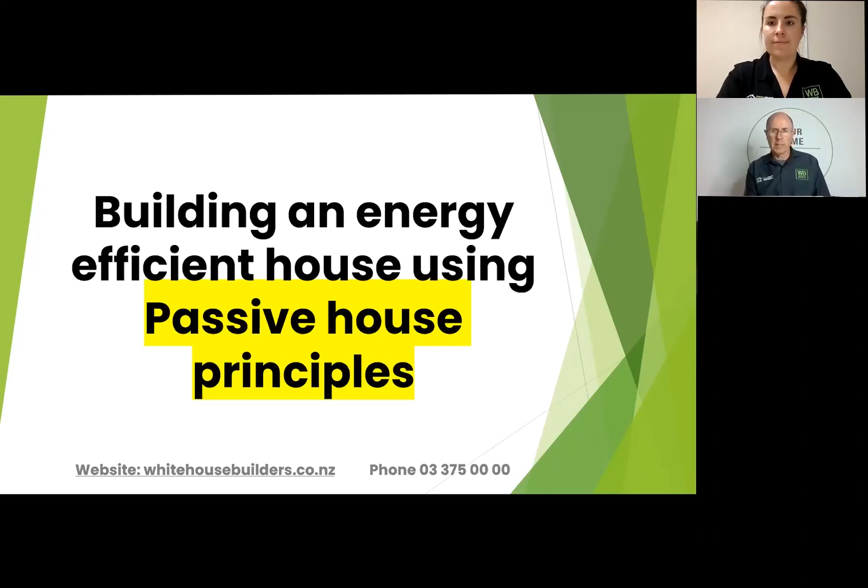Okay, thank you for giving us your time this evening, and hopefully what we're going to show you helps make sense about how to build an energy efficient home using the 5 passive house principles.

I think first of all, I better explain what I'll talk about today: who I am and what my qualifications are, what is an energy efficient house, and building an energy efficient house using the 5 passive house principles. I will explain each of them to you. What are the biggest causes of failures when building a passive house and how we avoid them from happening. There'll be an overview of what I've talked about, and then at the end we'll answer any questions that you have.

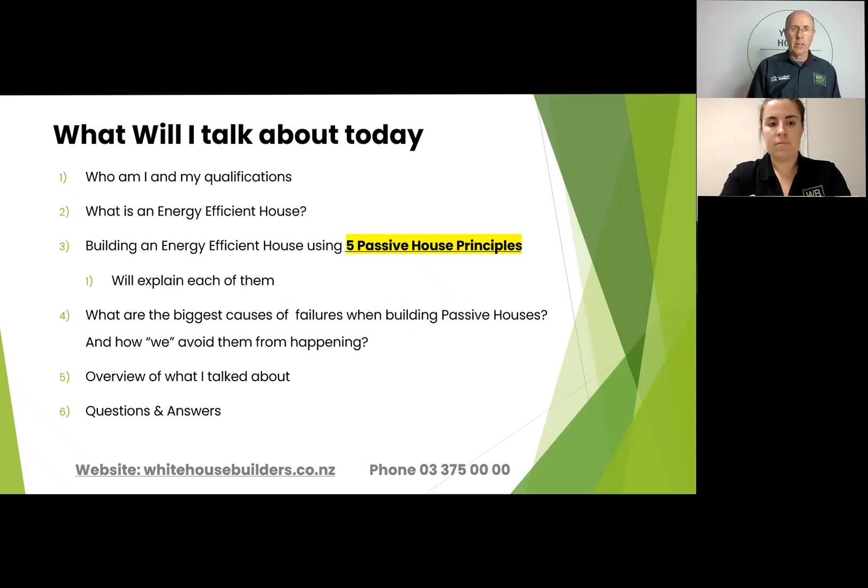So first off, who am I and what are my qualifications? I'm tradesperson certified by the International Passive House Institute, a licensed building practitioner, registered master builder. I've been building in Christchurch for over 20 years, and we're not here to sell you any particular product, only look at what works, and we're passionate about building energy efficient homes.

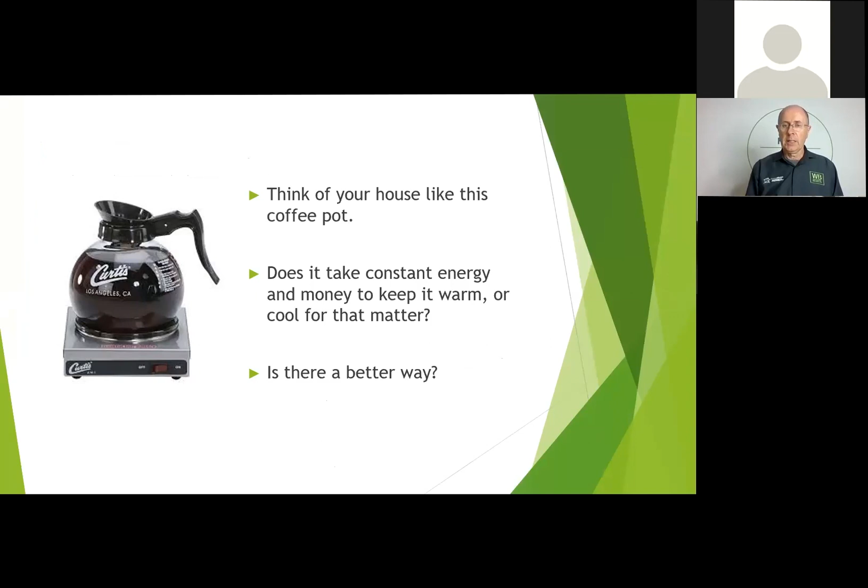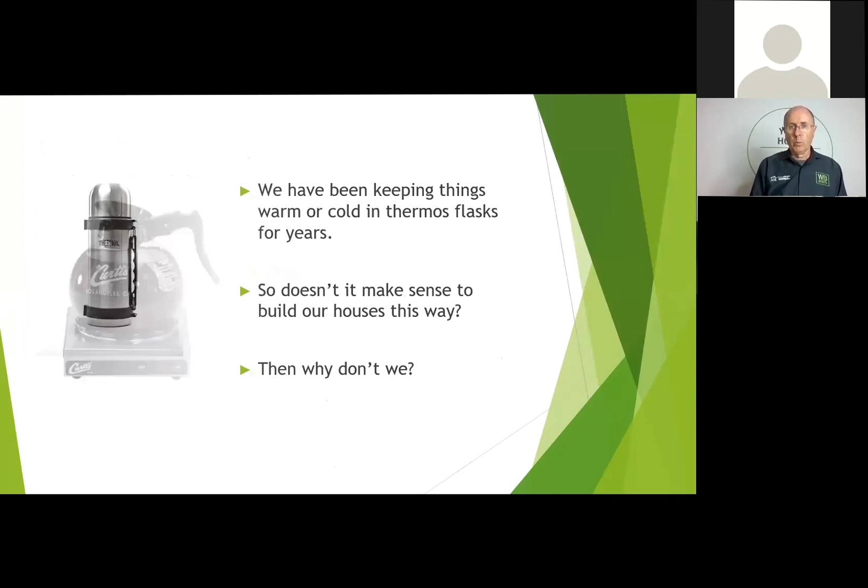So, if you think of your house like this coffee pot, does it take constant energy and money to keep it warm, or cool for that matter? And the question is, is there a better way? Well, we've been keeping things warm or cold for that matter in thermoses for years. So doesn't it make sense to build your house that way? And the question is then, why don't we?

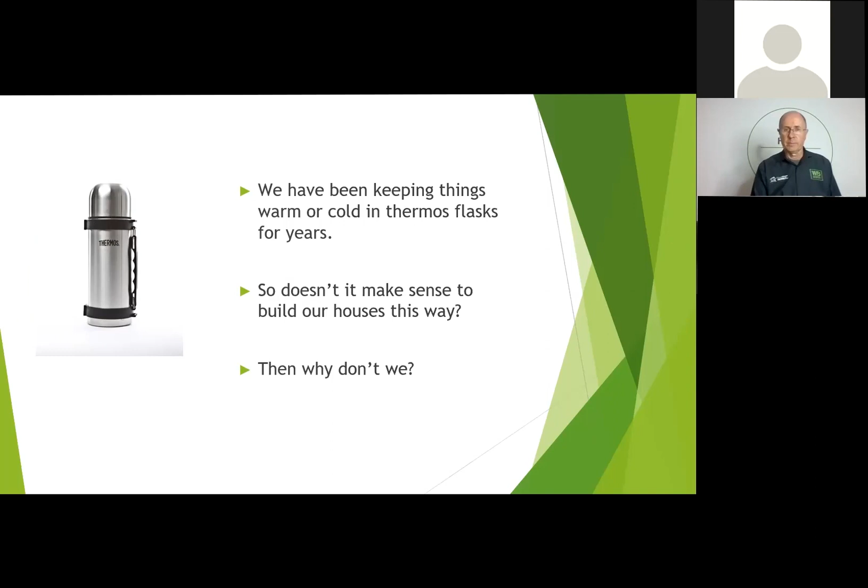This is a question I get asked all the time. What is an energy efficient house? And the answer is, to put it as simply as possible, how does the house lose its energy after the sun has gone down? And the less that it loses, the less you have to put back in. It's simple to do, but as you'll see, it's hard to achieve.

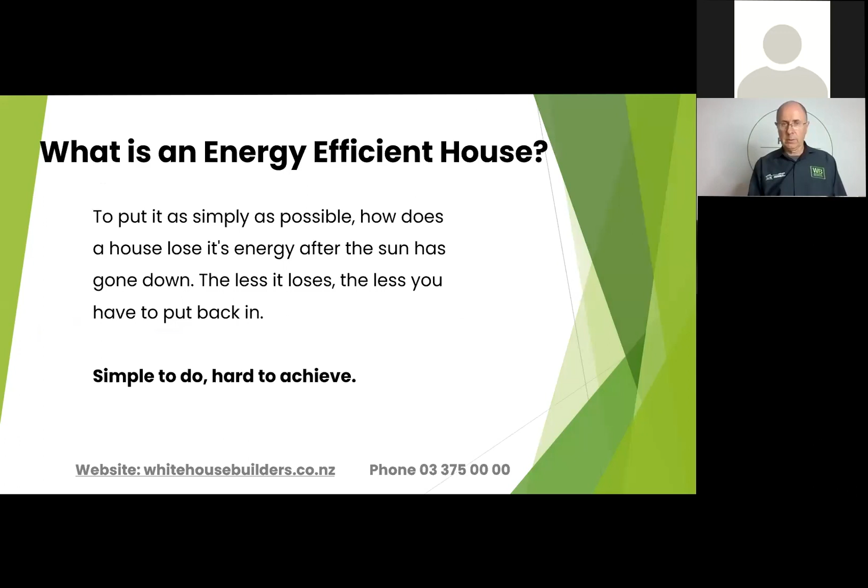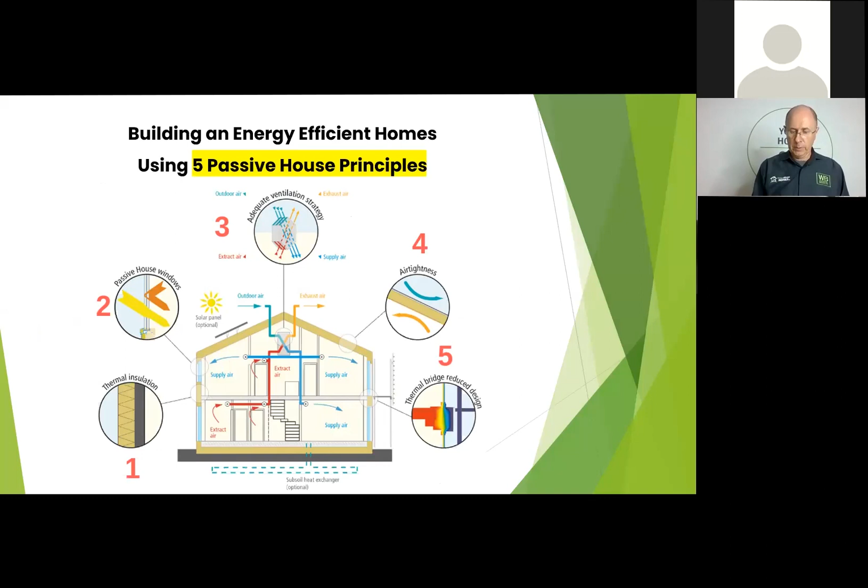These are the 5 principles that we use in designing and building energy efficient homes, the 5 passive house principles. And we'll run through them one to 5. So number 1, thermal insulation.

What are the benefits of good home insulation? Well, insulating your home to a higher standard will add to your comfort. It'll keep you warm in winter and cool in summer. It creates a healthier home environment for you and your family. It reduces outside noise. It reduces your energy bills. And it will have a positive environmental impact.

Now, I should say, the reason we put reduces your energy bills down the list is that, yes, the house will pay for itself over time, but there is a cost that's higher than the standard build to build an energy efficient home. So it costs you more money in the beginning, but it will pay for itself over time.

People who live in these homes will tell you about the comfort, and they'll tell you about the health benefits and how lovely the house is to live in all year round. So the comfort factor and the health are the 2 biggest reasons that we think that people should be looking at living in a home like this.

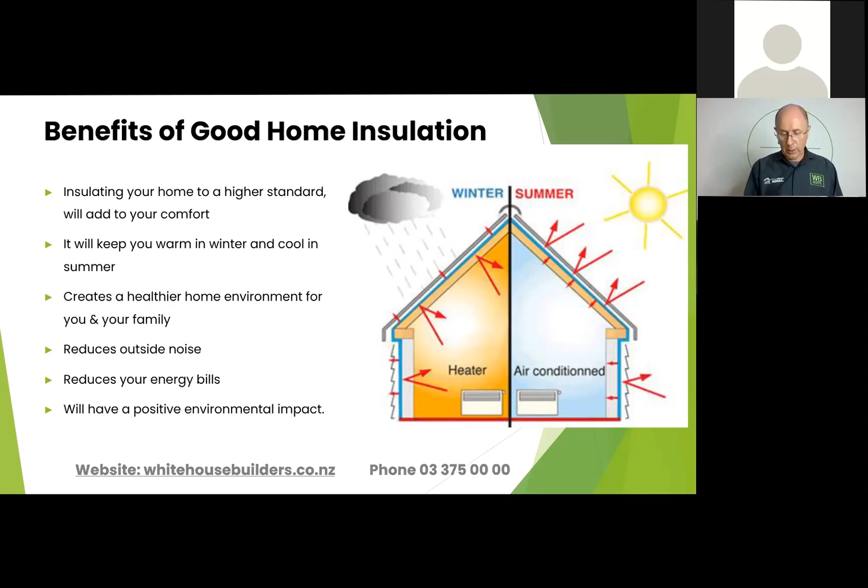Now, if you Google the World Health Organization, they will tell you that sleeping in temperatures below 12 degrees centigrade can seriously damage your respiratory system, and that adults should be sleeping in temperatures of 18 degrees, and babies and older people should be 20 degrees.

So it is a problem how people in the winters get a cold on them. They're going in cold environments all the time. They can't shift the cold because they're in that cold environment where the cold air, the damp air, is being breathed in and causing them problems all the time.

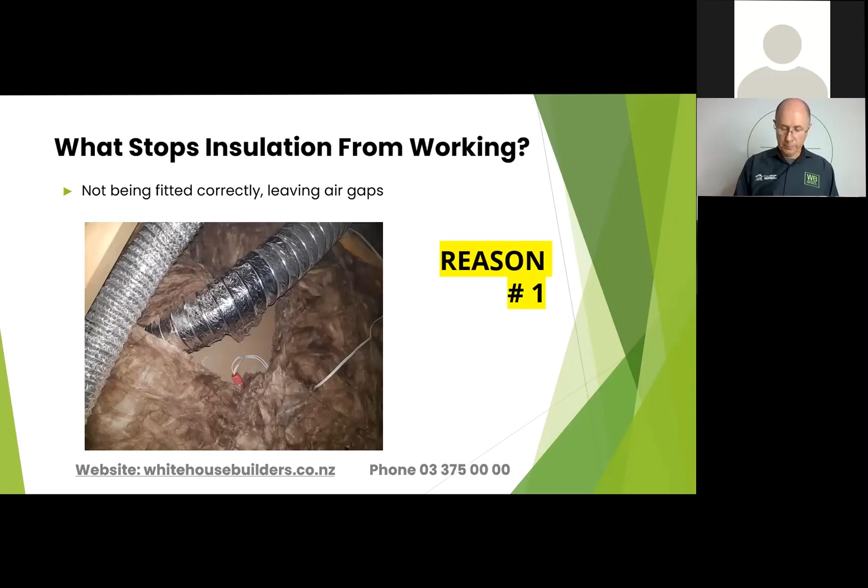The other thing that people find interesting is that if the insulation is fitted too tightly, not having enough air trapped between the fibres, then it also doesn't work. The wool insulation works by having the air, as I say, trapped between the fibres. And when it's crushed tightly, the fibres crush together and it conducts the energy across. So it reduces the effect of the insulation.

Unfortunately, what happens when people are building homes with the home builders is that it's done on a contract. People come in, they fit it as quickly as they can, and this is often the case where it's not fitted correctly, and then your investment isn't working.

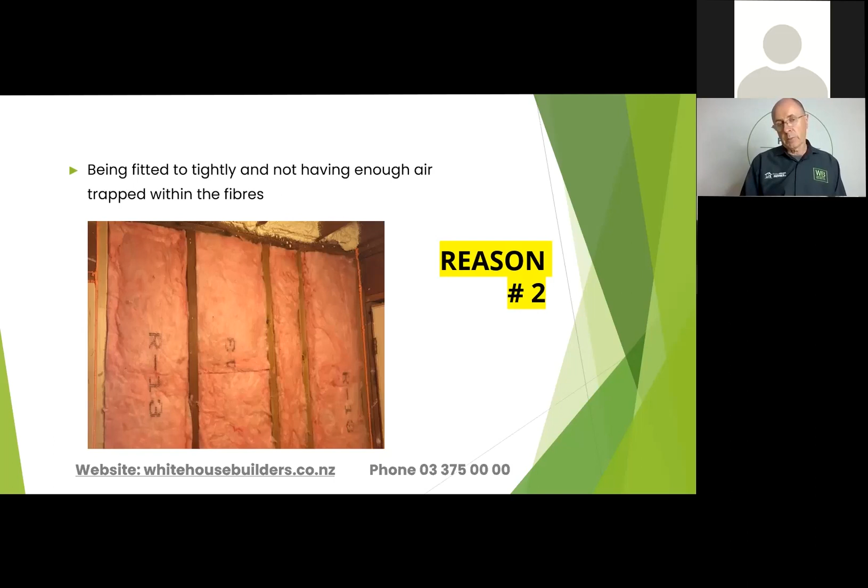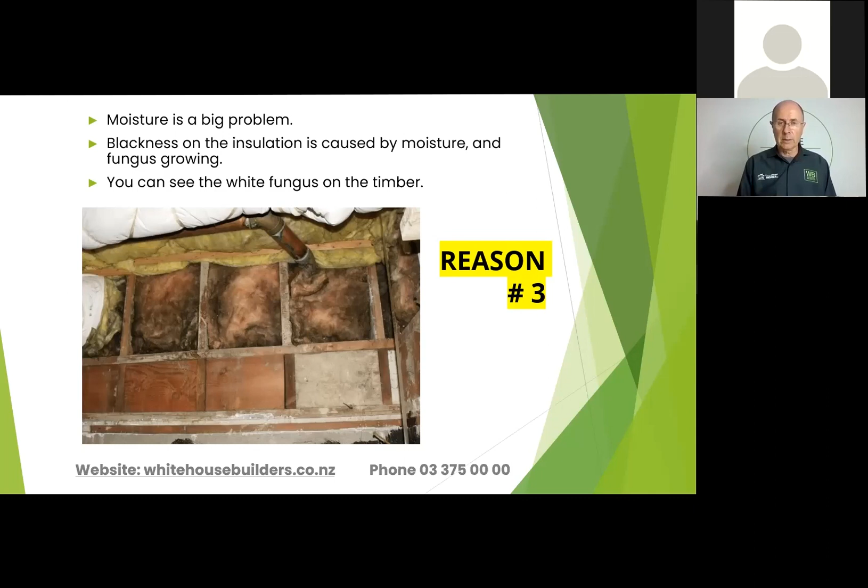Moisture is a big problem. The blackness on the insulation here is caused by moisture, and on the white part of the wood you can see fungus growing where the GIB has been removed after a few years. You can see the white fungus growing on the timber there, and it causes mold, and then there's all sorts of health issues that can be associated with that. Unfortunately, this is how our present building code deals with these problems.

So what happens is the air pushes through little gaps around your sockets, around any wires, any outside taps or anything that's coming through the wall, and it carries the moisture through. Once it gets to a dew point, it becomes like a mist, and it drops the moisture in the wall. Next your insulation starts to get damp and wet, it starts to sag, and then you've got no insulation in the wall. You've got big gaps in there. It is a major problem in how we build today.

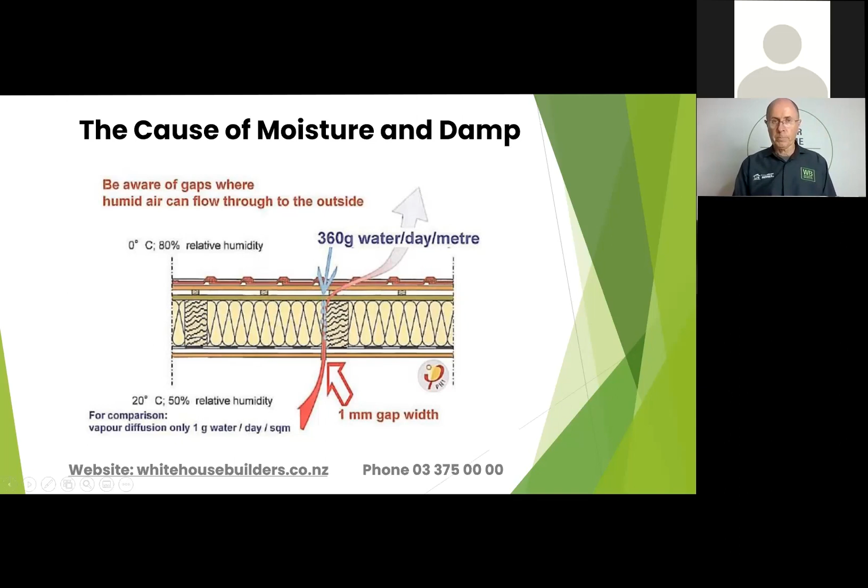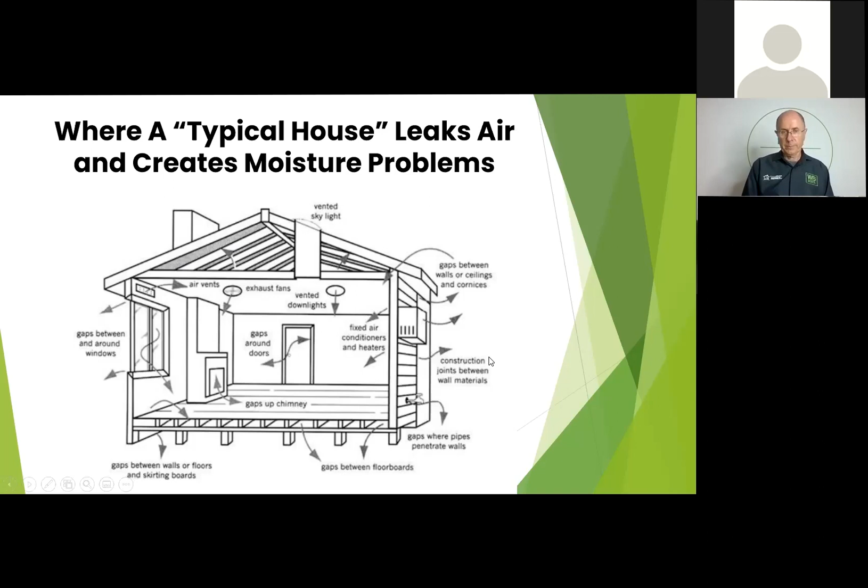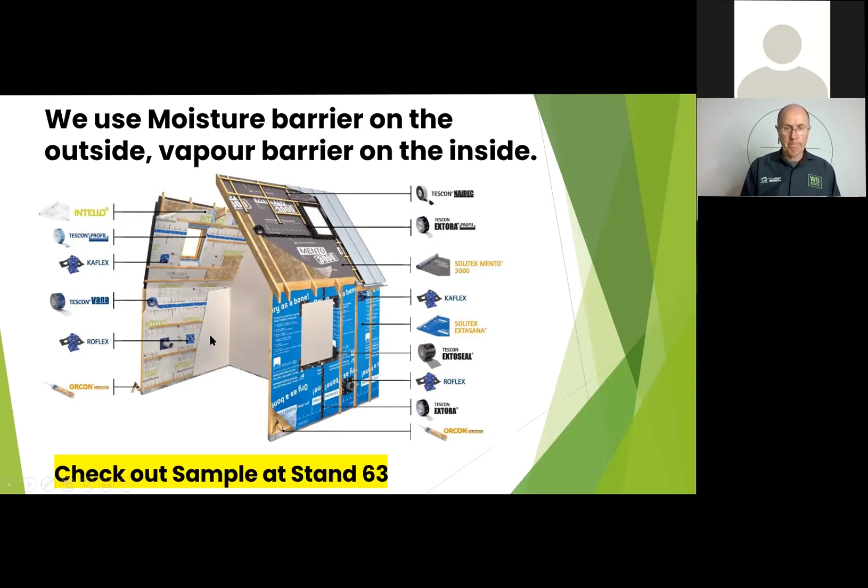Here's a cross section of how the moisture barrier system works. So again, this is the inside of the house here. This is your gib board, and then this here is your vapor check Intello on the inside. This is your timber frame, and this is your insulation here. This blue one on the outside here, this is your moisture barrier. So it won't allow any moisture through here, and we won't allow any vapor here. So we're keeping this critical part of the insulation dry.

This area here is just a service void. In the service void, that's where your electrics and your plumbing go. But you actually get another R1.4 insulation in here, or more insulation in there. In here, in a 90mm wall, you can get up to R2.8. Now, when you consider in Canterbury, the code is R2. Most builders will put R2.3, R2.4 in, or even 2.6.

But in a wall like this, you can get R4.2 on that wall, which is over twice the code of insulation. And also, the higher the insulation, the better the soundproofing as well with the home. But as I was talking about before, your services go here, and they don't penetrate this vapor barrier.

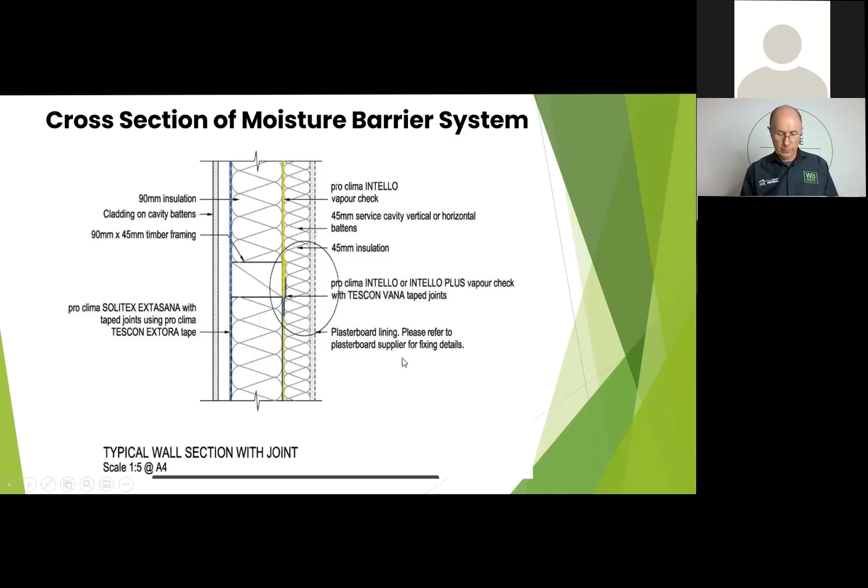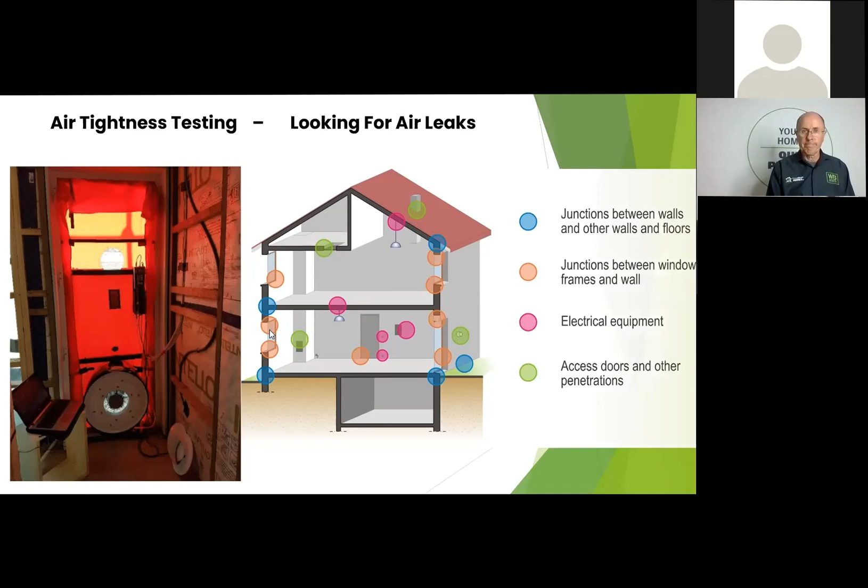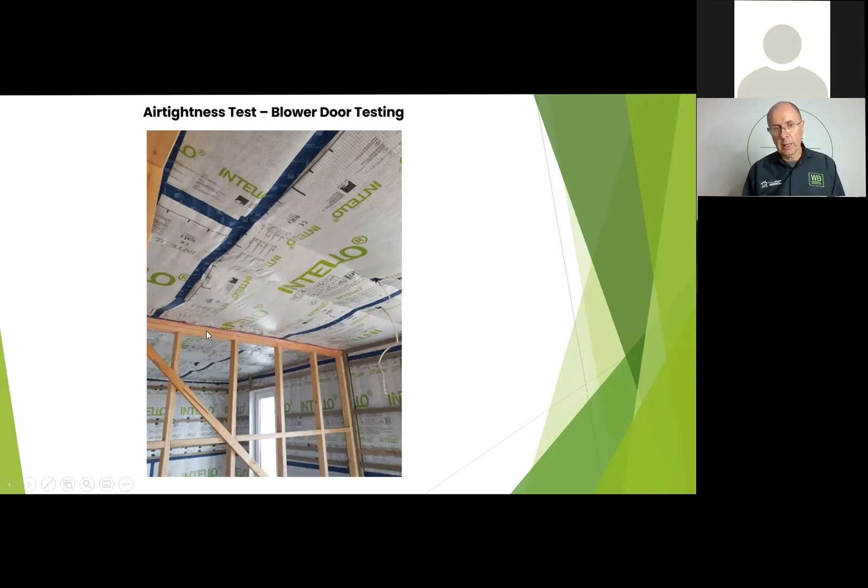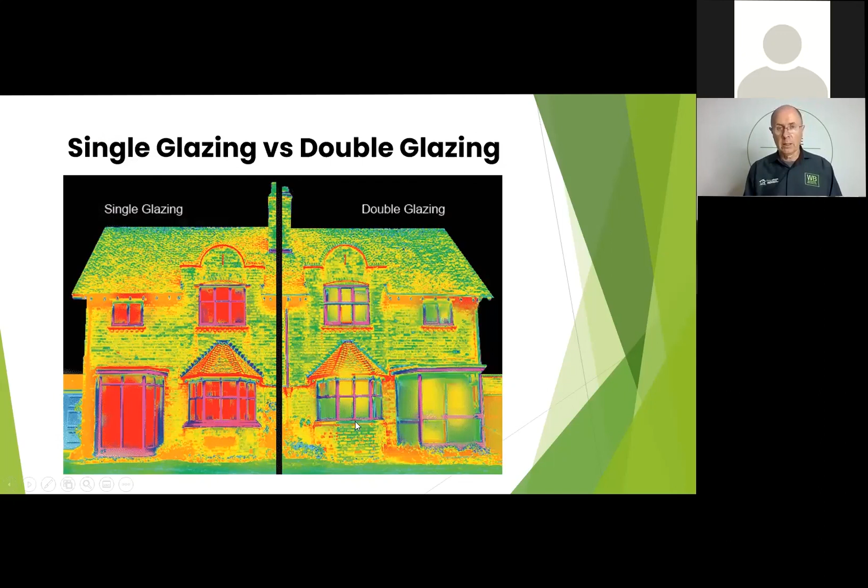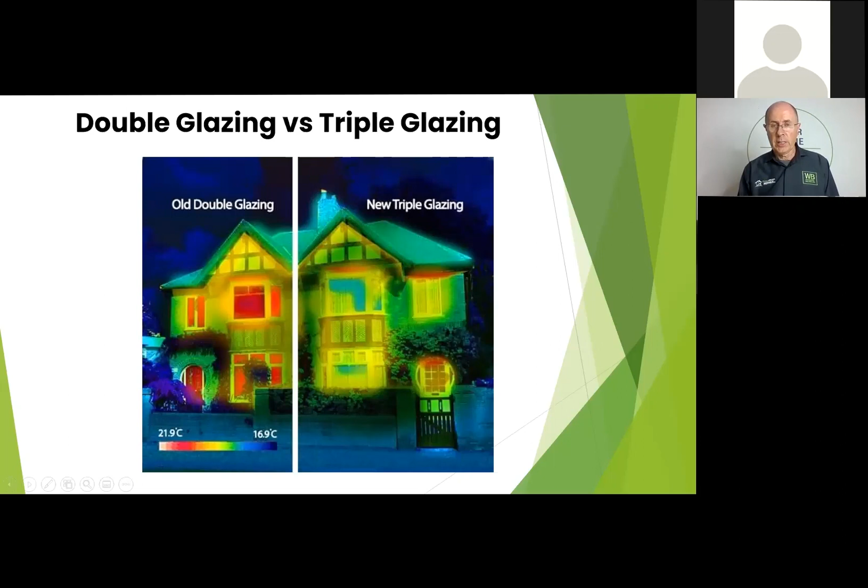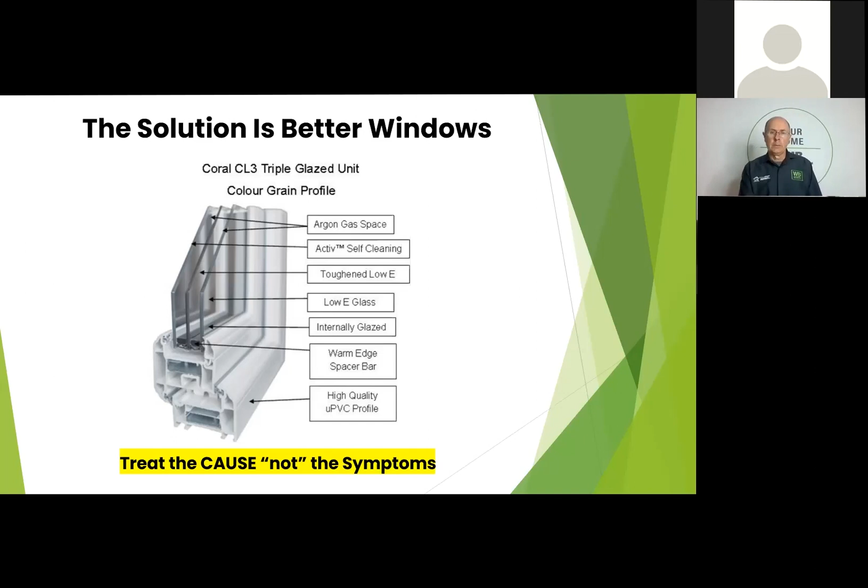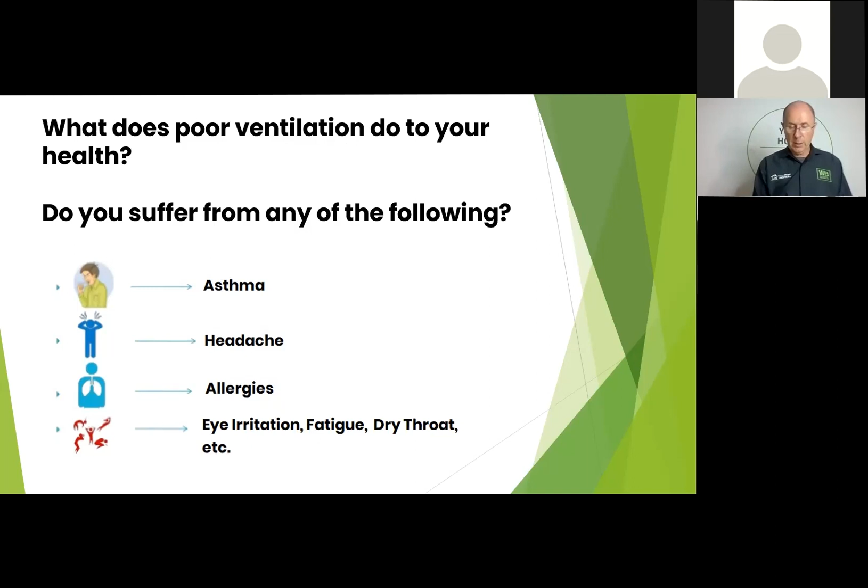Ventilation. This is what makes the house healthy. So what does poor ventilation do for your health? Do you suffer from any of the following? Asthma, headaches, allergies, eye irritation, fatigue, dry throat, etc. I think maybe 1 or 2 things that surprise you here.

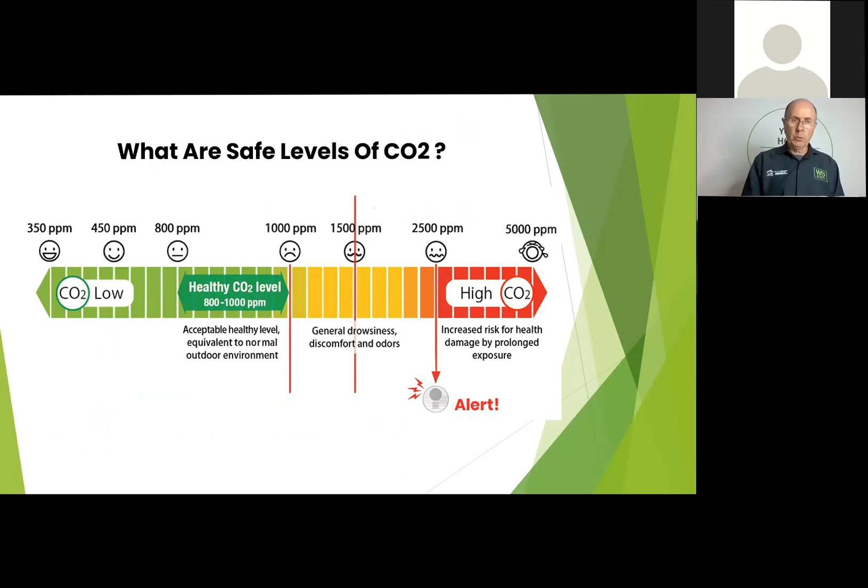So CO2, this is what we're breathing out. And what are the safe levels of CO2? Well, CO2 is measured in parts per million, ppm. And the best you would get is 350 parts per million. And you'd have to probably be out at Brighton Beach or wherever with the wind blowing off the sea to try and get anywhere near that. But good air quality, as you can see by the chart, is probably between 500 and 800 parts per million. And it's considered healthy up to 1,000 parts per million, which you would get acceptable in an outdoor environment.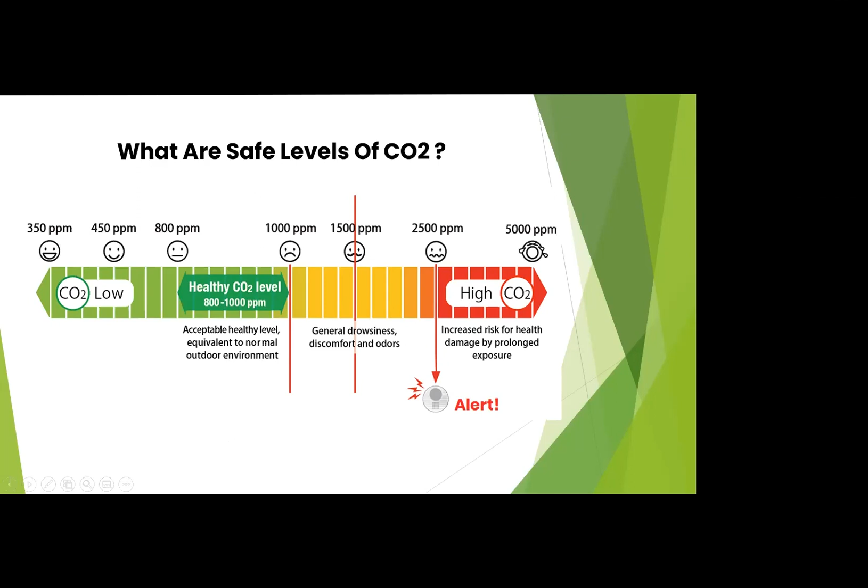Once you go to 1,500 parts per million, people start to complain about general drowsiness, discomfort, and odors and things. And then once we go past 2,500 parts per million, it starts to have an increased risk of health damage with prolonged exposure. And we can have some quite serious problems if we're at 5,000 parts per million or working in that environment. You're not allowed to do that without breathing gear.

An example here shows the CO2 levels in a 4x4 bedroom with two parents and a baby sleeping. This is your time, and this is the CO2 levels here. Just after 9 o'clock, putting the baby to bed, and the CO2 levels start to rise steadily with the baby breathing. The door's opened and the CO2 levels drop back down.

Then the two parents go to bed, close the door, and the CO2 level starts to rise. Here at 2:50 a.m., they open the door briefly to go and get a drink of water, go back to bed. At 5 a.m., open the door wide. One parent's still sleeping, but with the door open wide, the CO2 level starts to drop. And then the two parents wake the baby, they come out, open the window, and down it comes. The point about this is that it is rising at 430 parts per million per hour.

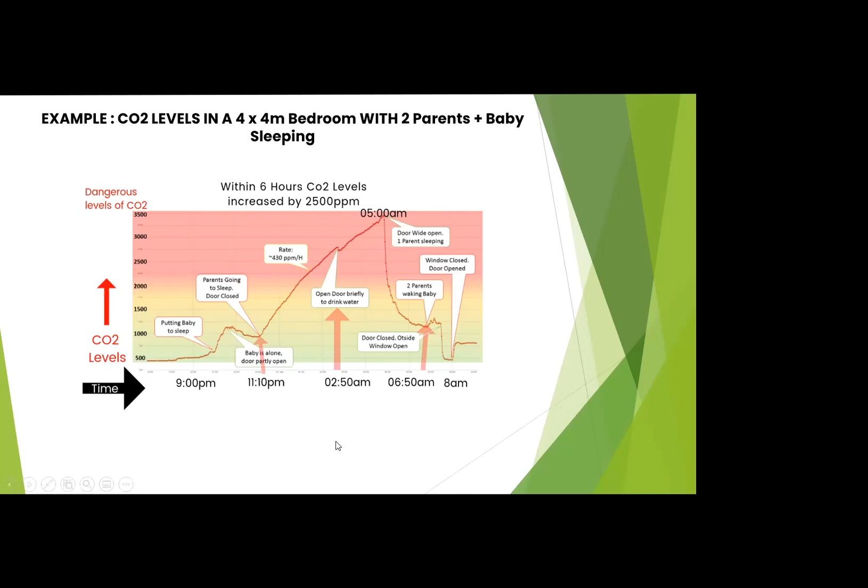At 5 a.m. in the morning, we're up at quite dangerous levels of CO2 in the room. So it's like trying to sleep with a paper bag over your head. And you can see how it drops down and people start to feel refreshed. It's no wonder a lot of people get up in the morning and feel more tired than when they first went to bed, because they're actually starved of oxygen in an environment like that.

Hydrogen sulfide in a toilet. This is one of my favorite slides for the humor it brings. This is the stuff that when you go to the toilet, somebody's been in there before you, and you turn around and walk away because of the level of sulfide in there. I took this picture at the Passive House conference over in Australia a few years ago.

So an extract fan that you'll have in your house extracts at 25 litres per second. The one used in the Australian test is 27 litres per second. And a Passive House certified unit is 6 litres per second, so substantially less than the 27 litres per second. Here you can see, after 2 minutes, the Australian one on the left and the Passive House one on the right. And you can see the fresh air starting to be introduced.

And this is quite pungent in both rooms at that time. After 16 minutes here, you can still see that the sulfide is still lingering in the air in the toilet. And the Passive House one here is totally clear. So the question is, how does that work?

Well, the reason it works is it's balanced. So for every litre of air we take out of the house, we're putting a litre of air in the house. And it's a little bit like having a glass of water. You can't keep putting water in the glass unless you're emptying it out the other side. And that is what we're trying to do here. The reason there's no air coming out of here is there's no air coming in.

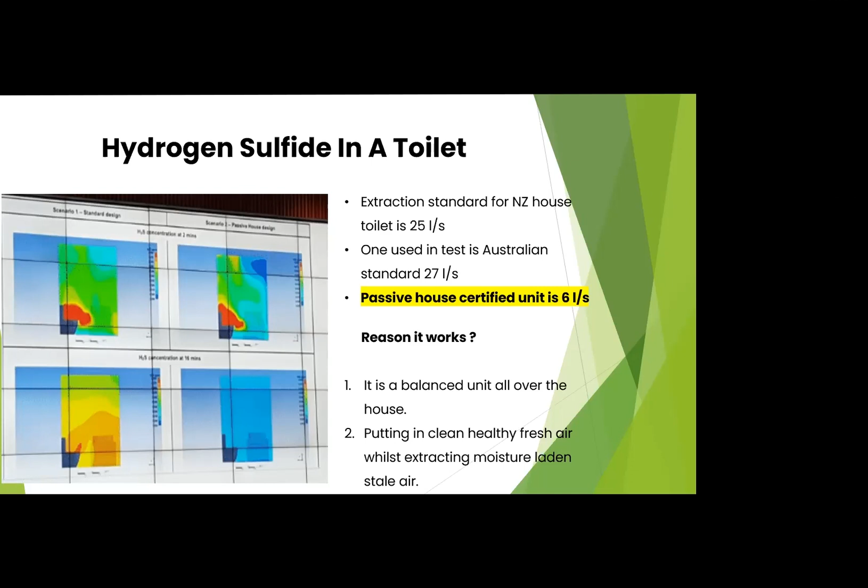The air quality in the house comes through filters. So the air quality in the house is better than the air quality outside, and it will deal with things like pollen and carbons outside, and you'll have a nice fresh feeling in the house, and it's also very dry because it deals with all the moisture problems, because it extracts from all the wet areas.

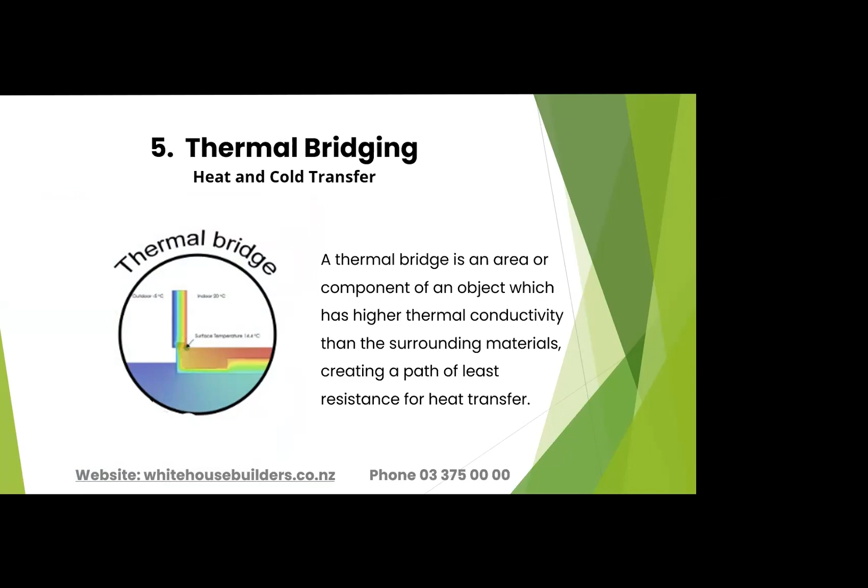Thermal bridging. So thermal bridging is a bridge where heat goes to cold. And what we'll show you is some examples of design and how thermal bridging is working. So this is a house. It's actually a SIPS panel house. And where you can see here, the purple patches, this is the timber in the walls. The yellow part here is insulation. And here is 25.8, so it's quite warm in the room. The coldest part is 22.6, that'll be these areas here. And the warmest part is 32.9, which is probably this light here.

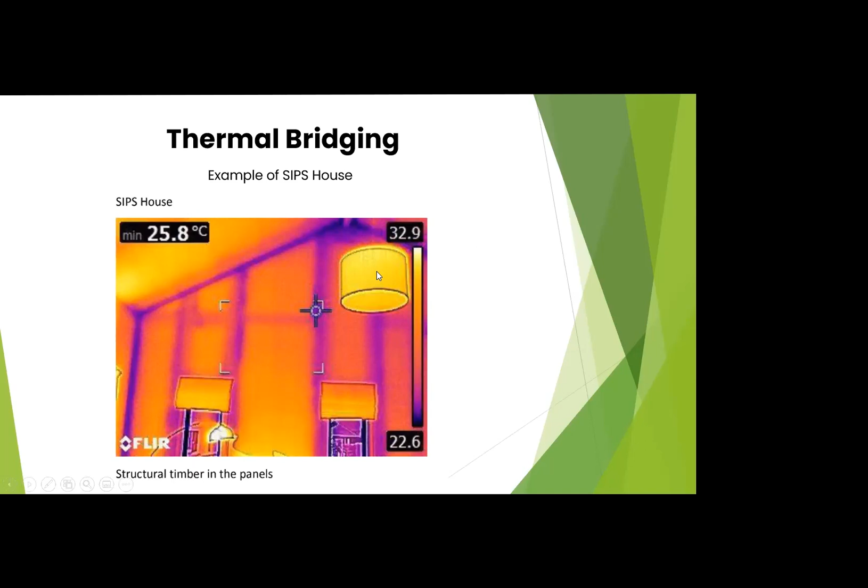So here is a window, and this is a thermally broken aluminium window. Now what you can see here on this purple part, the room temperature, it's very warm in here because it's 27.6. And this area here is actually 24.7. This area down here, because it's in the sunlight, is 39 degrees. So now your thermally broken aluminium windows are radiators. So you've already got a warm house in the summer, but now your windows are radiators and actually warming the house, which again then has to be cooled.

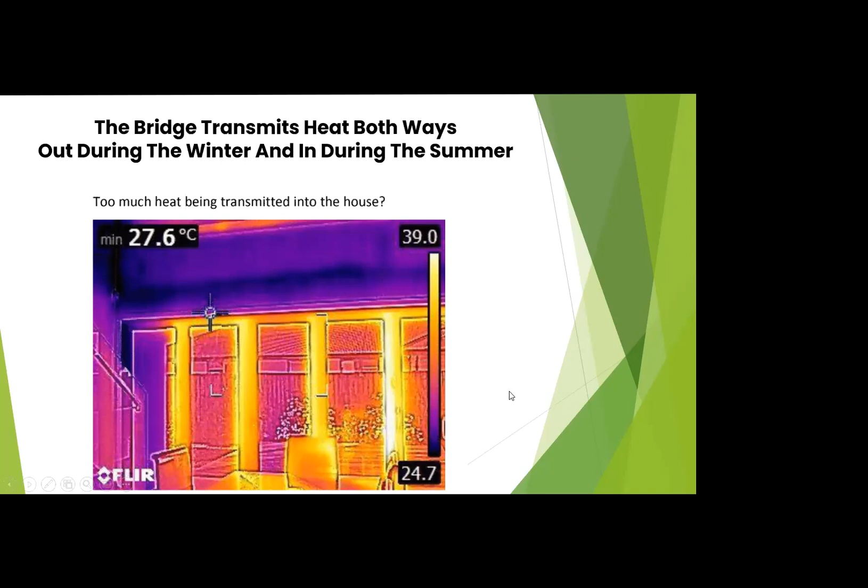Here you can see thermal bridging with heat loss examples. Here, insulated walls. You can see there's a lot of heat loss around the surface, around the windows. The windows are obviously very poor for heat loss. In the corner here, the reason there's heat loss is when they build houses, they don't put insulation wherever you get internal walls or in the corners. You have to put the insulation in before you put it together or before you put your building wrap on. Here, there's no insulation in the wall, and you can see insulation here. But you can see areas where the house is losing lots of energy.

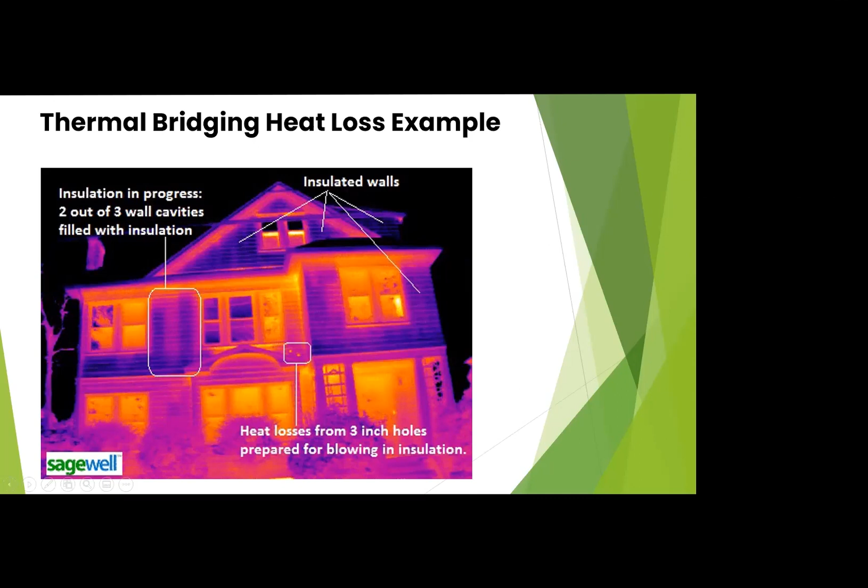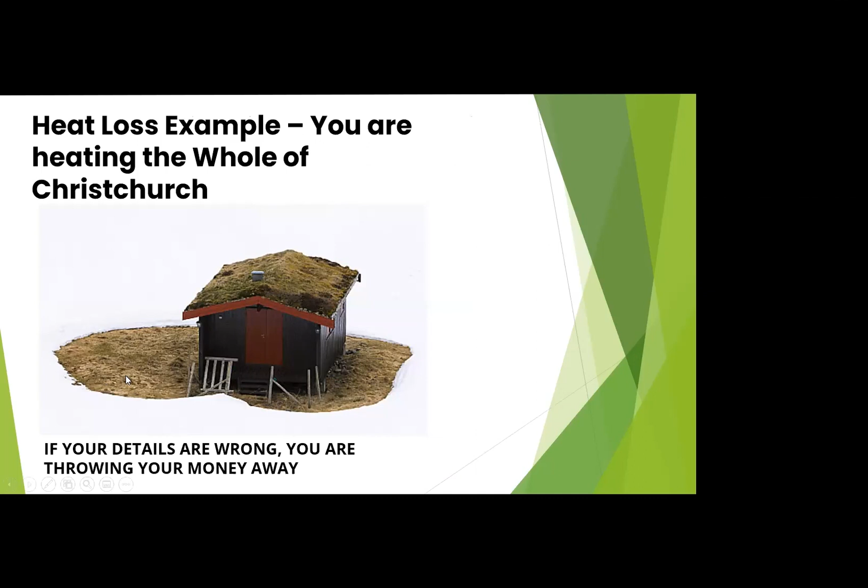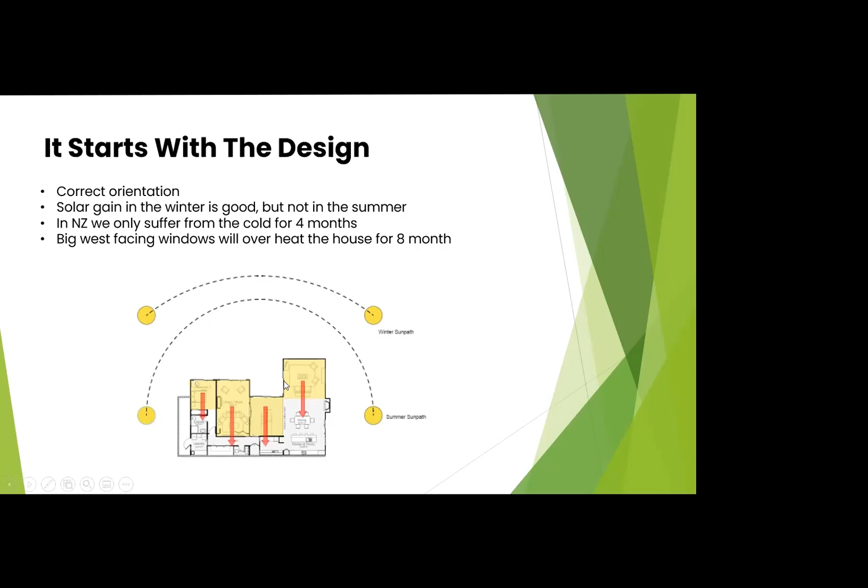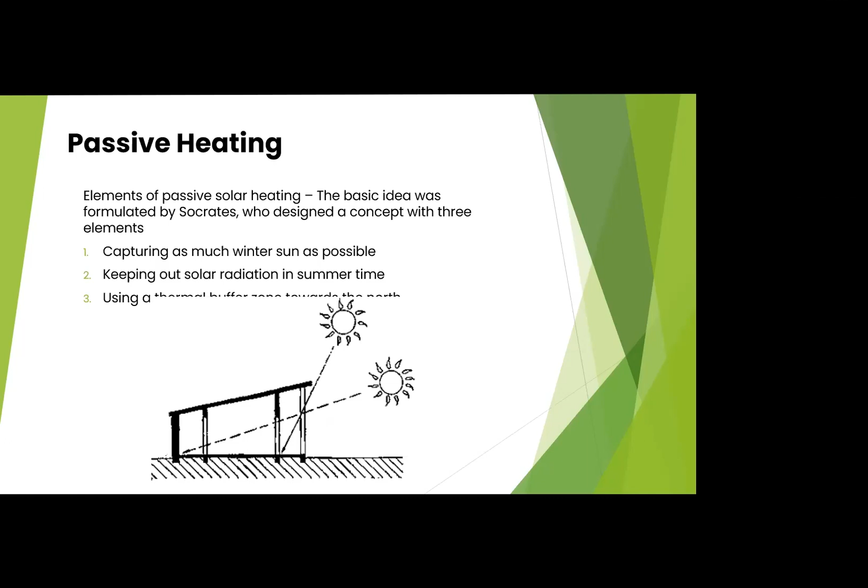Now, I'd like to tell you that we've come up with all these ideas ourselves, but unfortunately, passive solar heating is a basic idea and was formulated by Socrates, who designed a concept with 3 elements. And I think he died in something like 450 BC. So again, capturing as much winter sun as possible, keeping out solar radiation in summer, and using a thermal buffer to retain that heat. That's passive energy, passive heating.

So we touched at the beginning, what were the biggest causes and failures of building a passive house? Well, number 1 is bad design. So the architect or designer has to be passive house trained. Overheating is a big problem with energy efficient or passive homes. And the poor understanding of the critical details by installers or builders.

Now, when I go to the Passive House Conference, they always say the biggest failure worldwide is the builder or the installer not understanding what the architect has put on the plans and the materials being installed correctly. The failure rate is an astounding 85% worldwide. So it is a major problem. The question for us, how do we stop that?

Well, we as a company make sure our designers are passive house trained, as I touched on a minute ago. We ensure that sub-trades, electricians, plumbers, etc., all understand the end goal. And we employ and train our own building teams. And we control it from start to finish. That way, we can ensure your investment in what you're doing with us works. And that, honestly, is the only way.